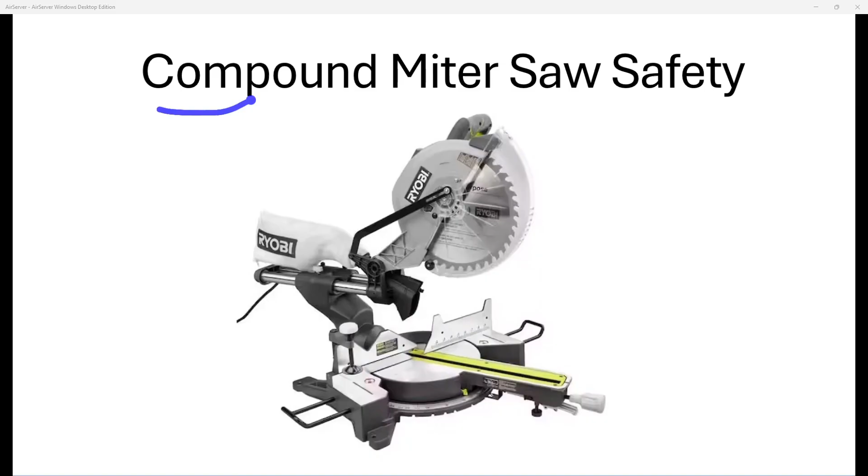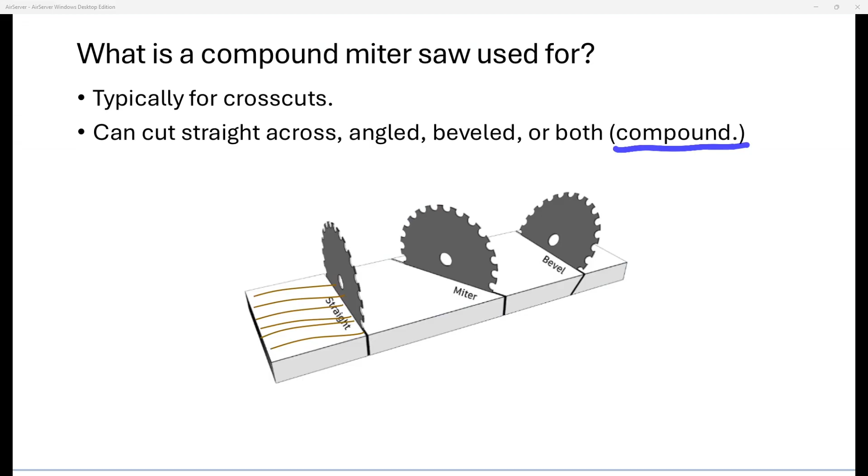In this video, I'm going to talk to you about compound miter saw safety. A compound miter saw is a saw that's primarily used for cross cuts. A cross cut is cutting across the grain of the wood. And you can do straight cuts, cut at an angle called miter, or cut where the blade is actually tilted, or both. If it's mitered and beveled, then that's what's called a compound cut. That's why it's called a compound miter saw.

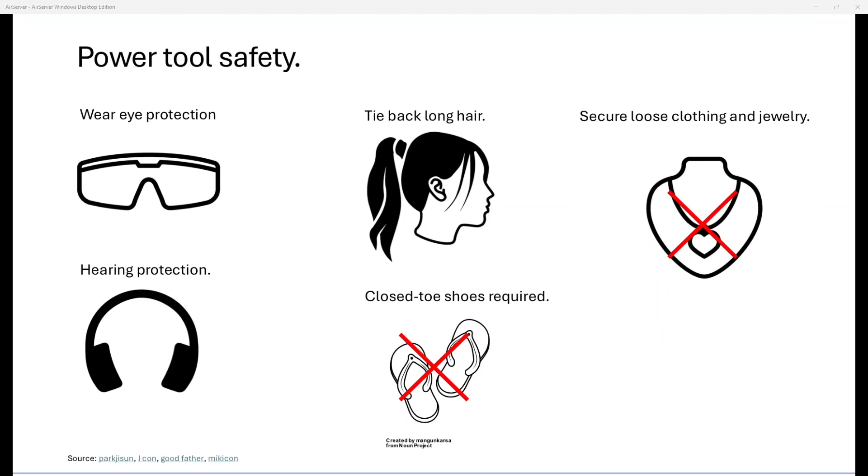As with all power tools, you have to follow safety rules. You must wear eye protection at all times. You have to wear hearing protection. These things can get loud. And you have to tie back long hair or secure loose clothing or jewelry because you don't want anything that could get caught in the blade and pull you toward the blade. Finally, you do need closed-toed shoes to protect your feet in case things drop.

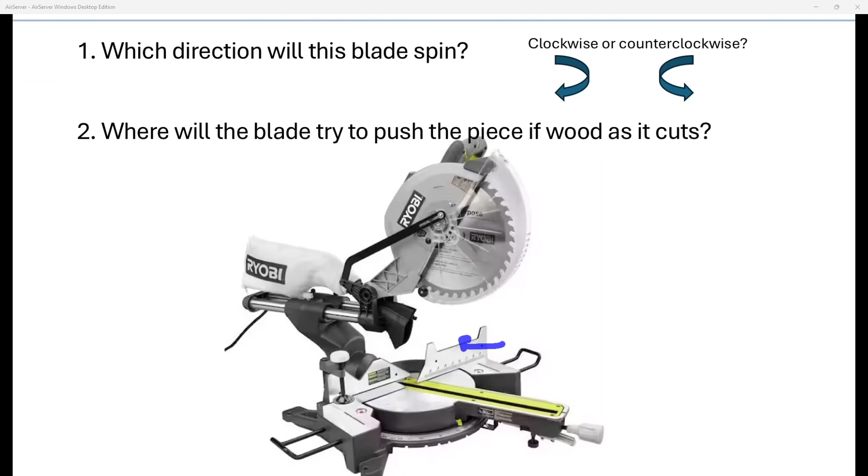The blade is the dangerous part, so you must keep a minimum of 4 inches away from the blade. Any part of your body should be at least 4 inches away from the blade. And be careful if you're going to do a miter or bevel cut, because let's say you're doing a miter cut, it may look like your blade is a fine enough distance away at the start of the cut, but if it's heading towards your hand, then you have to really plan where the cut's going to go and make sure that your fingers are always 4 inches from the blade.

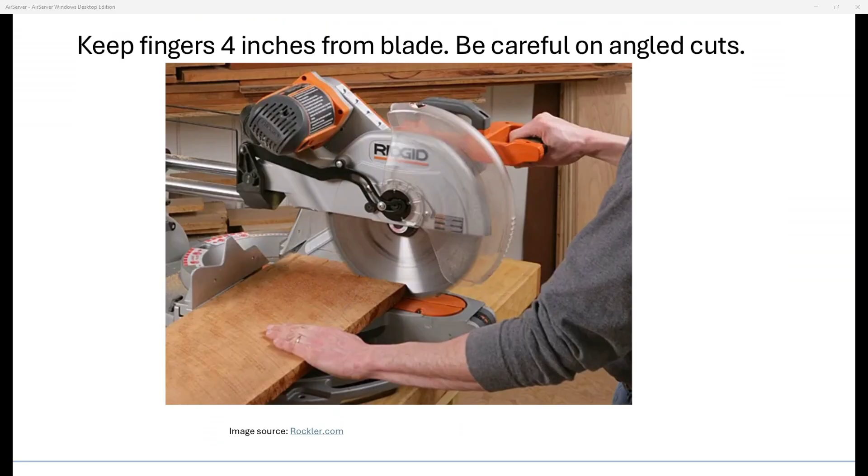If it's too close or if you don't feel comfortable, or if it's a dowel, which is like a round surface which is hard to hold securely, use a clamp. There's a clamp on the miter saw. Or you can use a hold down tool. This tool, you can kind of push down on this tool. This is nice and firm. So if you push down on this tool, it kind of levers and pushes this end. So it's holding the piece down for you, and this can be pushing down closer than you'd want to ever have your fingers.

So here's the way that you make a cut. For a narrow piece, a piece that's not too wide front and back, you are going to lock the sliding mechanism. Normally this blade can slide back and forth on these rails, but if you lock the sliding mechanism, it won't slide and it can just pivot down, and that's one way to make a cut.

So you lock the sliding mechanism, start the blade, and let it spin before you cut the wood, and then bring the blade, just kind of pivot it down and cut through the wood, and then stop the blade at the bottom before you lift up the blade.

It's more likely, I think, that you'll have wider pieces and need to actually use the sliding mechanism. So the way this works is you slide the saw towards you, start it and get up to full speed, then bring the blade down, and as you push it away from you, that's when it's going to be making

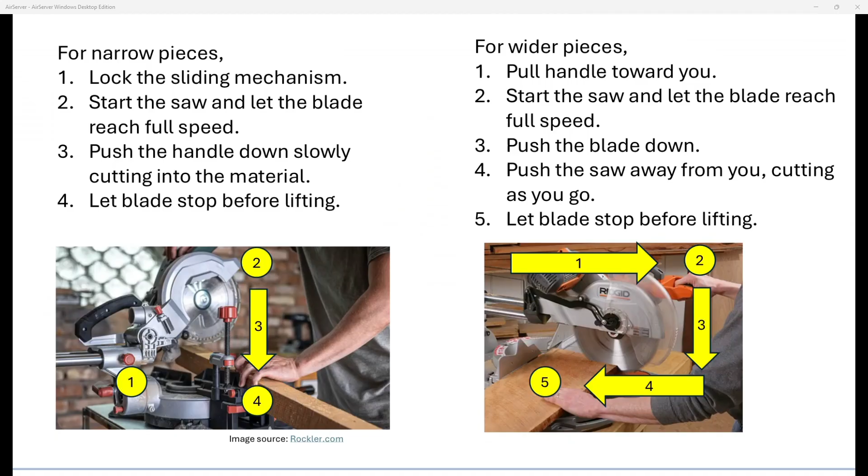the cut. And you'll just be continually putting downward pressure to keep the blade buried as it goes into the wood. And then finally, same thing, let the blade stop before you lift the blade up and remove the piece of wood. The reason you have to let the blade reach full speed is because if you don't, the blade will be jammed against the wood and it probably wouldn't even start spinning. Or if it does, it will jam the wood and try to kick the saw blade back to you.

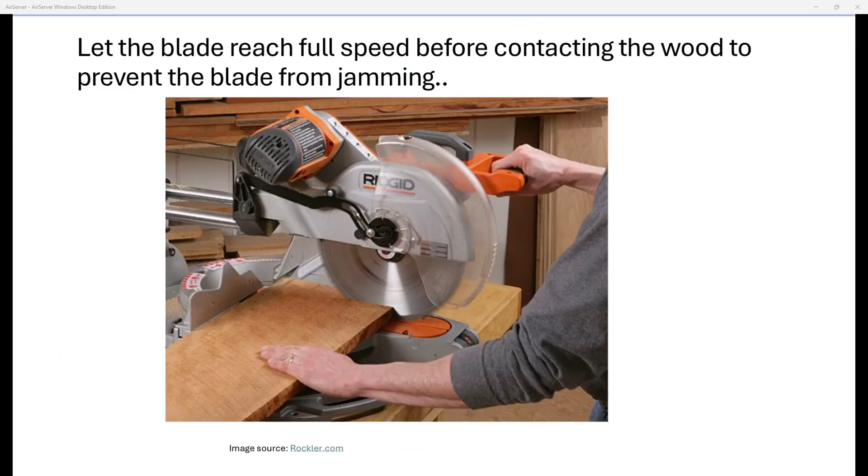Kickback is a really, really important concept to understand, and it's very dangerous. Kickback is if something happens to jam the blade, since it's spinning this way, and let's say it's all of a sudden stopped because it's been jammed, the whole saw could actually come back towards you, and that's a very dangerous situation.

Another thing related to kickback is if it jams a piece of wood, and even if the whole blade mechanism doesn't kick back, it'll try to kick the wood out and send that flying, and having a flying piece of wood is dangerous as well. So to prevent kickback, important things. Number one, if you're going to clamp or hold a piece, do it only on one side of the piece of wood. Don't clamp both sides of the piece of wood.

Because as you make this cut, you can kind of picture this cut. If this cut's going through, what's going to happen is this piece of wood can just naturally have a place to move away from the blade. It's not going to be pinching the blade or causing the blade to jam. But let's say you had a bigger piece of wood and you clamped it and it has no place to move, then you're essentially holding a piece of wood next to a really fast spinning blade.

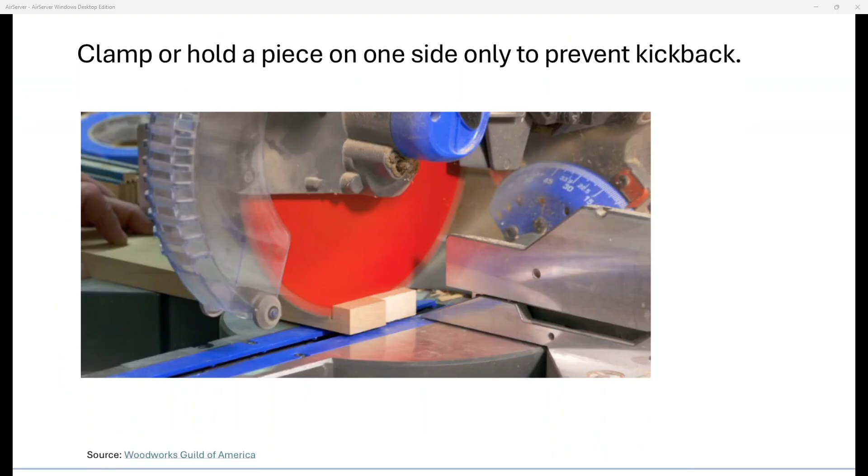And if that just gets caught in this blade, once again, it could either kick this piece of wood or kick back the blade. Either case is a dangerous situation. So only clamp one side of a piece of wood and let the other side just kind of move away from the spinning blade to safety. If there's anything weird or wonky about the wood, just don't make the cut. Ask an instructor for help.

Things that are bowed or warped can cause kickback or jam. Reclaimed wood might have staples or nails in it, and those can just send pieces of metal flying. Pressure-treated wood or wood that has paint that could contain lead, you don't want any toxic chemicals going into the air that you're breathing in. And wood with loose knots, the knots could go flying. The knot is like a little place where a branch used to be coming out of a piece of wood.

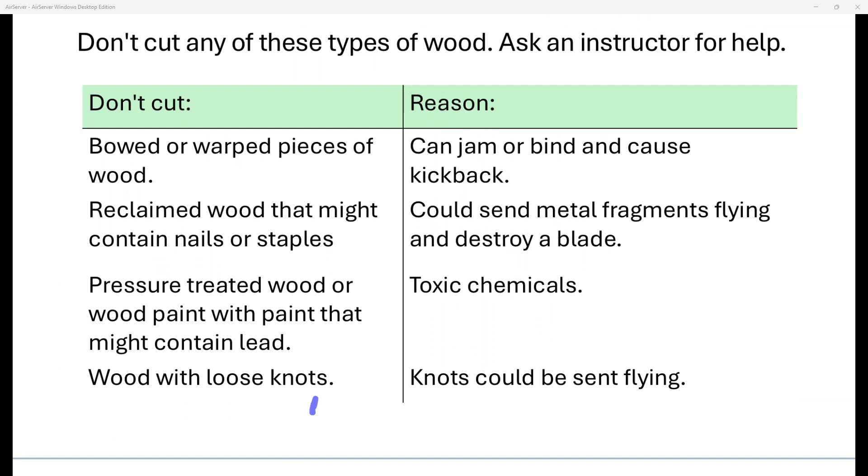Okay, and then there's just one little technique item: after you make a cut, the saw actually removes some wood. That's where the sawdust is coming from. So there's a little sliver of wood that's been removed, and this is called a kerf. And so to be accurate when you're making cuts, just pay attention to where you want your cut to be and where you want that kerf to be cut out of.

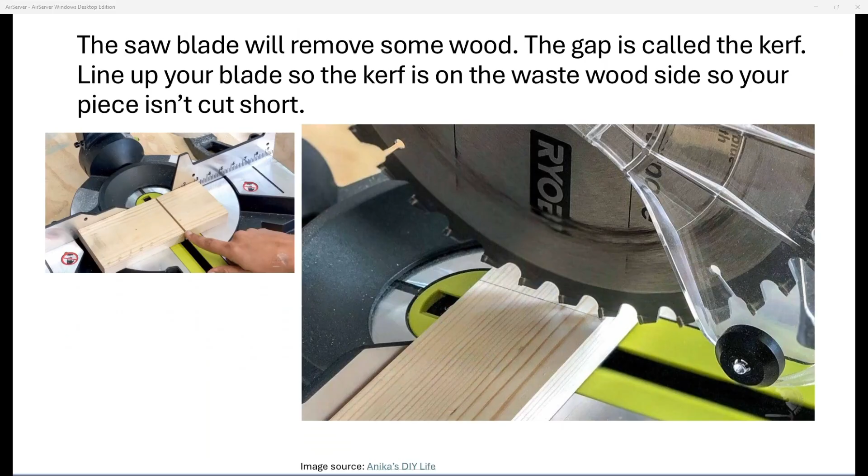For example, if you make this measurement, and let's say you want that 20 centimeters up to that line, that means you don't want to cut on this side of the line because then your piece will be too short. You'll want to cut on the far side, the waste side of the piece of wood. Depends on where you made the measurement, because if you're measuring from the other side, then you want to do it the other way around. Okay, so this tool is really powerful, and it can be safe if you treat it with respect and follow the safety rules.